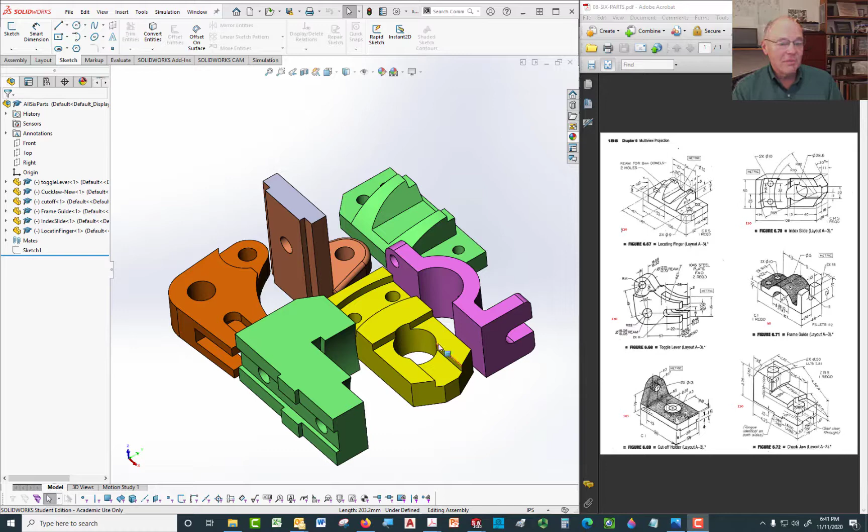This is what all of them look like, so we could move those around a little bit if you wanted, and they pretty much look like that. What I'm going to do though is open up each one individually and then rotate it around so you can really see what it looks like. So we'll go in order.

We'll go to the locating finger. Locating finger looks like this in the position that you see it in. Turn it around, you notice there's a notch at the top. One thing people sometimes don't recognize is there's a little shelf right here in front of the part that has a curve to it.

Turn it around, look up underneath it. Those holes go all the way through. Turn it around a little more, get it out of there. That's what it would look like from this side. That's this part right here.

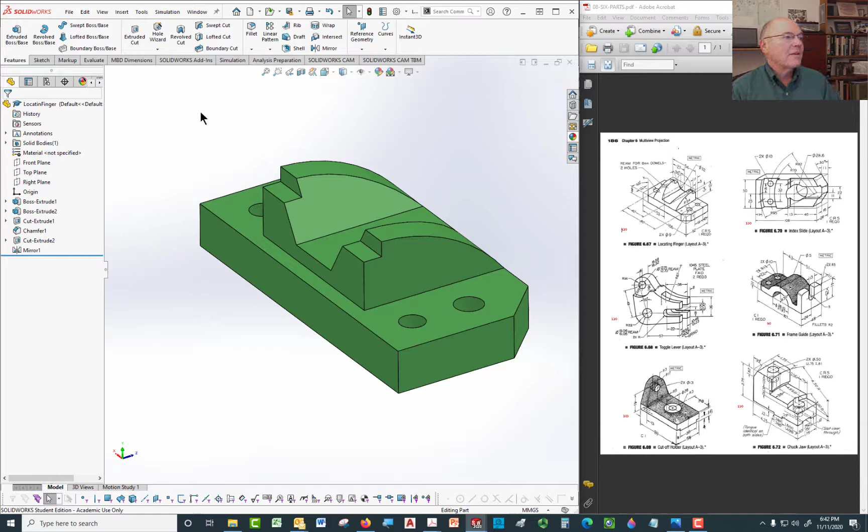Now we'll take a look at the index slide. Index slide looks like this. That's more or less the view that it was given there. Has a big hole that goes all the way down through the part. Sitting on its base, it would look more like this. The holes go all the way through.

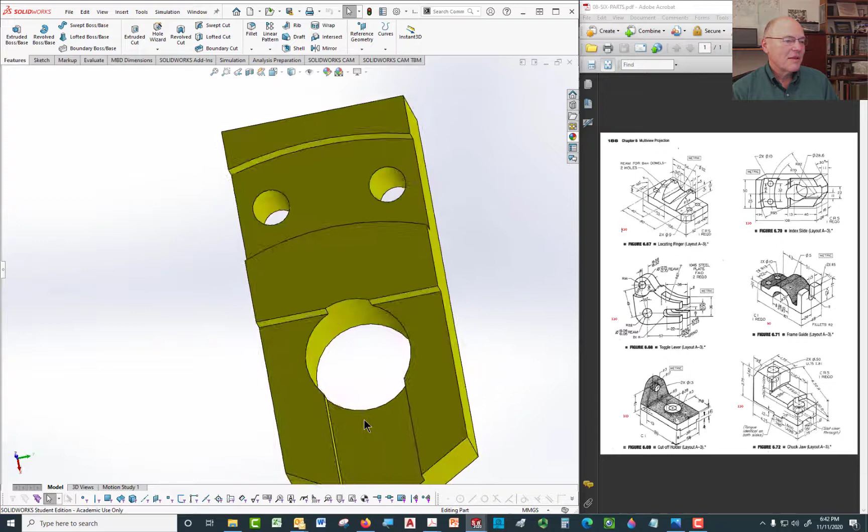And one of the things that you might be interested in is the fact that it looks like that from the top, and it would look like this from one end, look like that from the other end. You turn that around a little bit, you can see that looking down through there, you're going to see the back part of that hole right there. You can see that in the isometric drawing over here.

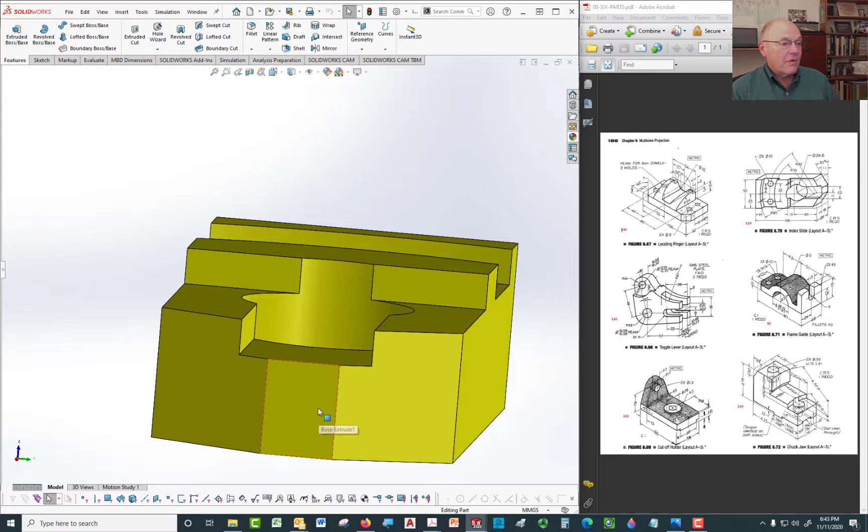And if you were to look straight at it, it would look like this. Let's tilt that a little. You might have it more look like that.

Next one we'll look at is a toggle lever. Toggle lever looks like this. Move that around a little bit. See there's a slot that goes all the way down through the center. Might be a little easier to see this if I turn on the edges.

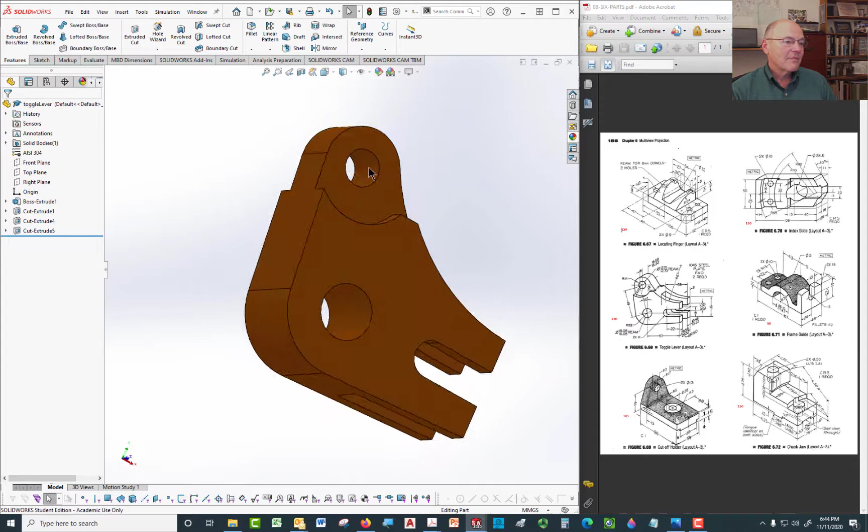I turn them off because I don't want you to think that tangent edges should be displayed. That edge right there would not be drawn in the part. But this does make it a little clearer just how deep that little groove goes. If we looked at it directly from the front, you also get the sense where that little shelf is right there.

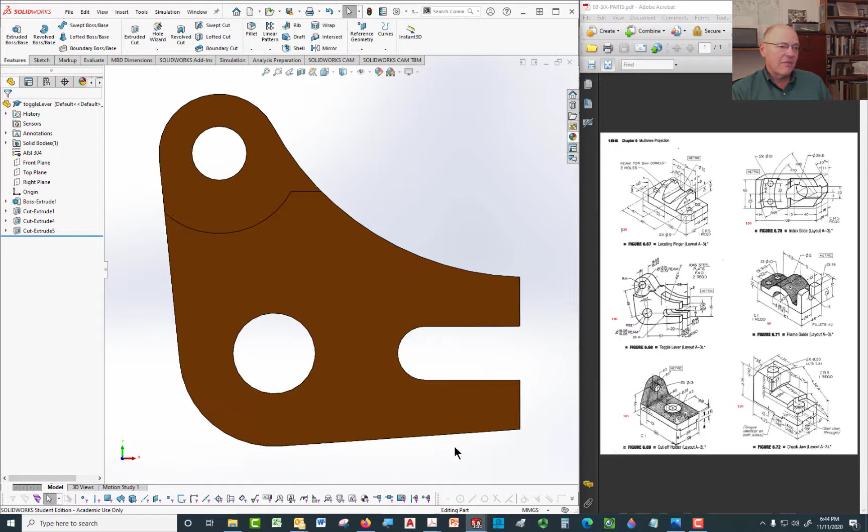If we looked at it directly from the front, it's clear that the base is not horizontal. Slopes down. Might not be as clear here, but that's what it would look like. So you have to have this arc drawn in. You have to locate that point over there and then draw a line that goes from that point tangent to that large arc. The frame guide looks like this.

Hole goes all the way down through. Look at it from one end, you notice that the slot itself would be kind of blocked if you looked at it from this end. Turn it around like this, and now you can see this end pretty well, but it would block a lot of the other features.

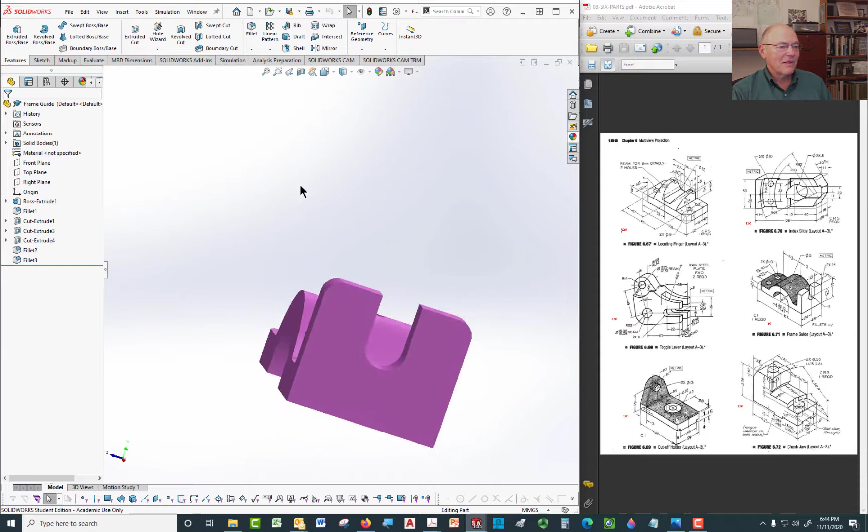There's some fillets in this. Fillets are right there, these kind of tiny little fillets. Again, I'll turn on the filleted edges. Those edges are where the fillets start and stop. They're all tangencies. You wouldn't draw that. You wouldn't draw this one over here, either one of those. So what it would really look like to the eye would be that.

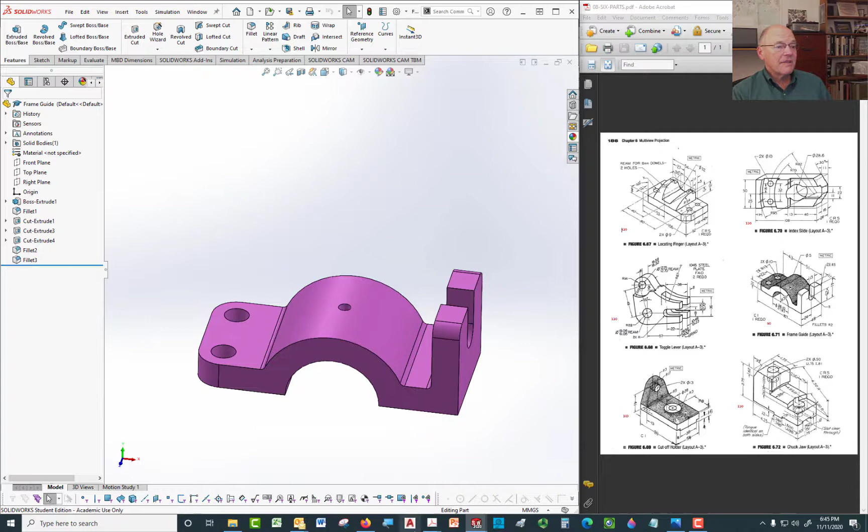However, by convention, in the top view of this, you would show where these two surfaces connect. So even though it would actually look like this, you should draw a line that comes right down where the two surfaces would come together so that it's clear that there's a feature that changes there. Otherwise, it looks like it's just flat in the top view.

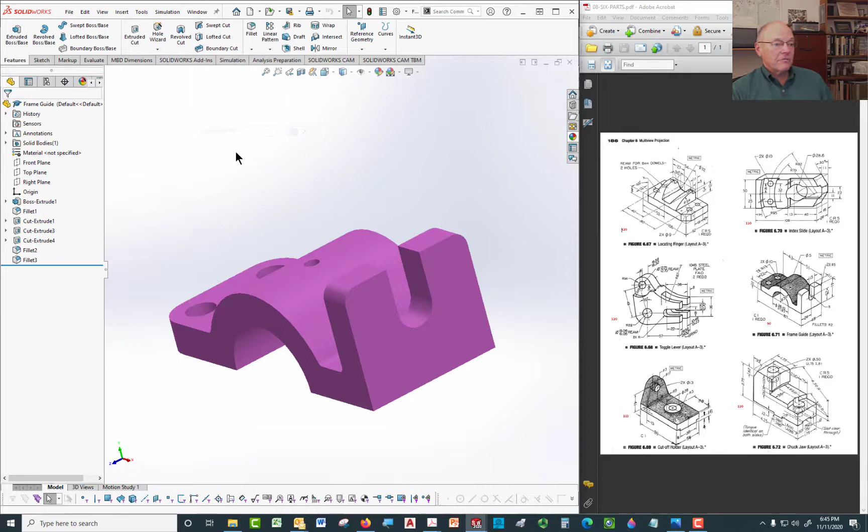Cut-off holder. Get the cut-off holder. Looks like that. Has a raised boss in the middle. That's that piece right there. It comes up, a little platform that's flat. Got two holes that are the same size. They both go all the way through. Got a couple grooves that go down through the bottom. The end looks like that.

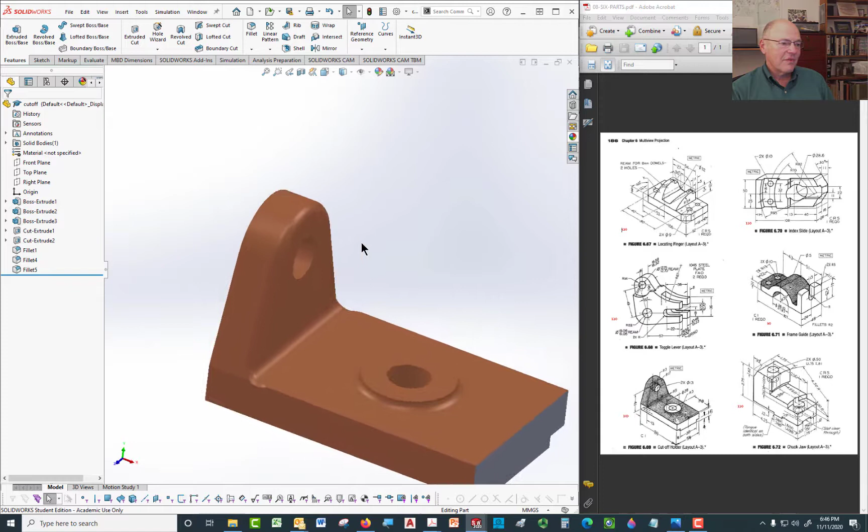And this also has a number of different fillets on it as well. There's a fillet on this edge right here. There's a fillet that goes across here. That's a machine surface. There's a fillet right there. Fillet goes all the way around. And then there's a round that goes down through here like that. Again, if we look at that with the tangent edges showing, you can see it's pretty distinctive, but by the naked eye, it would look like this.

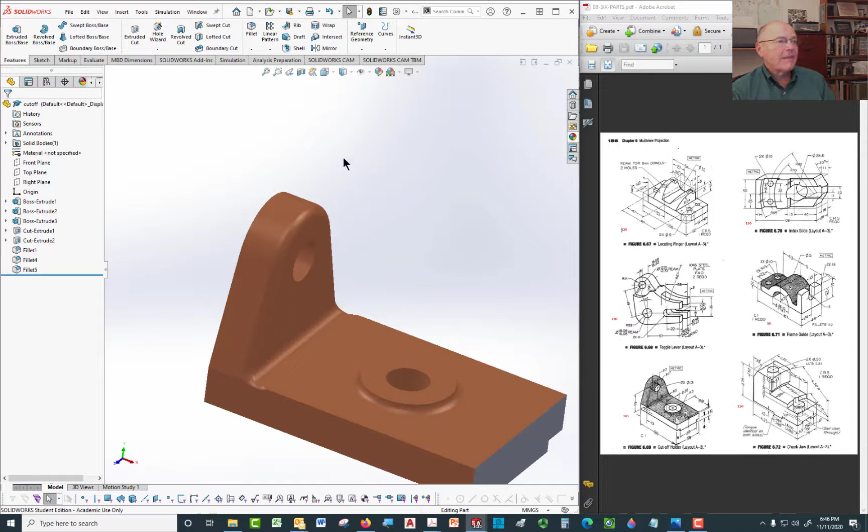The last thing is the chuck jaw. Chuck jaw is a part from a 4-jaw chuck that would go on a lathe. It's got a number of arcs in it. And it also has, this one maybe we should look at cut in half. Let's cut this one in half. We'll do a section view of this. Section view looks like that.

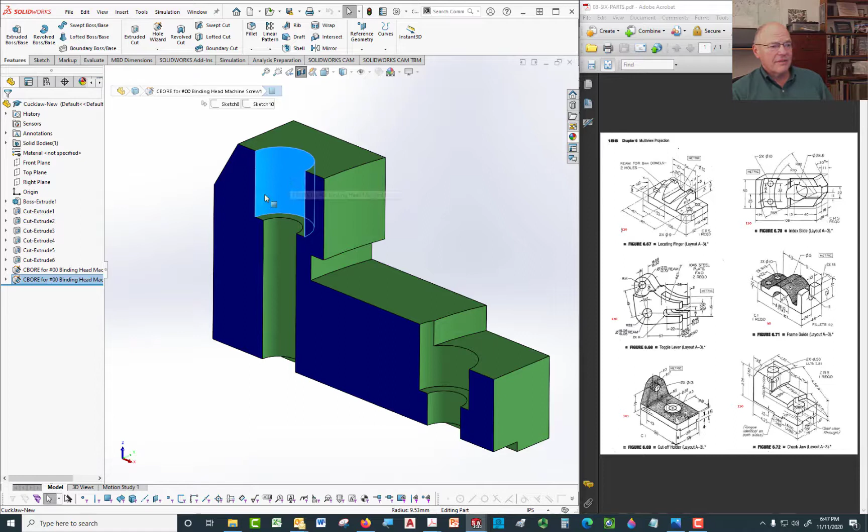So if you look at the inside, you've got a counter bore, which is a hole that's larger than the through hole. It goes down a certain depth, and it's given to you over here when you look at the dimensions. Right there, the diameter is 750 thousandths or 0.75, and the depth is 0.81. So the depth is going to be the distance from that surface to that surface right there. And there are two of them.

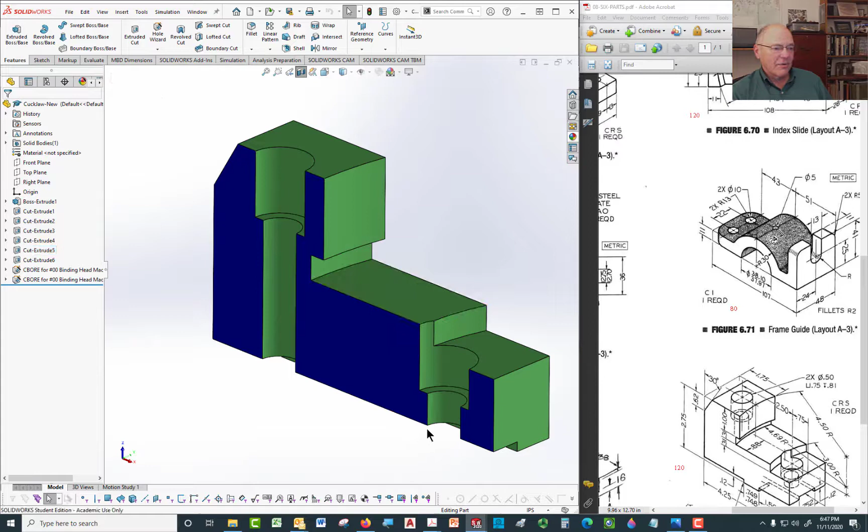In this case, the depth starts here because it starts at the deepest part of that counter bore. In both cases, they go all the way through. Notice they go through and they come out where the cutaway is on the bottom. If we take this off, you'll notice that those holes don't penetrate that surface and they don't penetrate this surface. So when you draw this, you want to be careful that your hidden lines are not misleading.

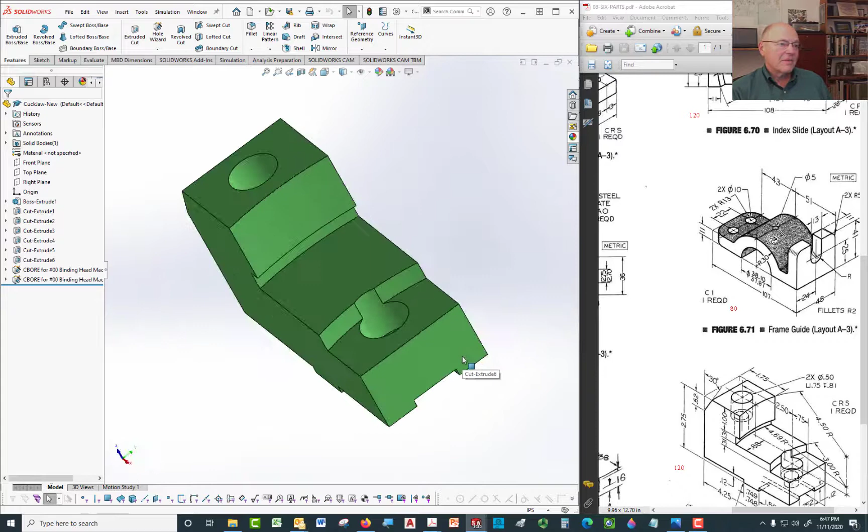That's what this one looks like. Got a couple things going on the bottom. Looks like that. Now I'm just going to go back to the full assembly with all of them, and I'll just rotate it around one more time, kind of slowly, and then I'll finish this up.

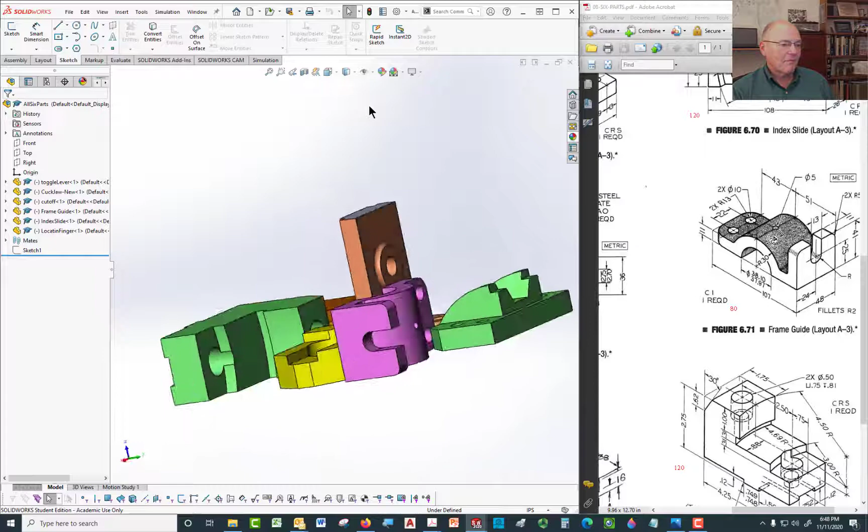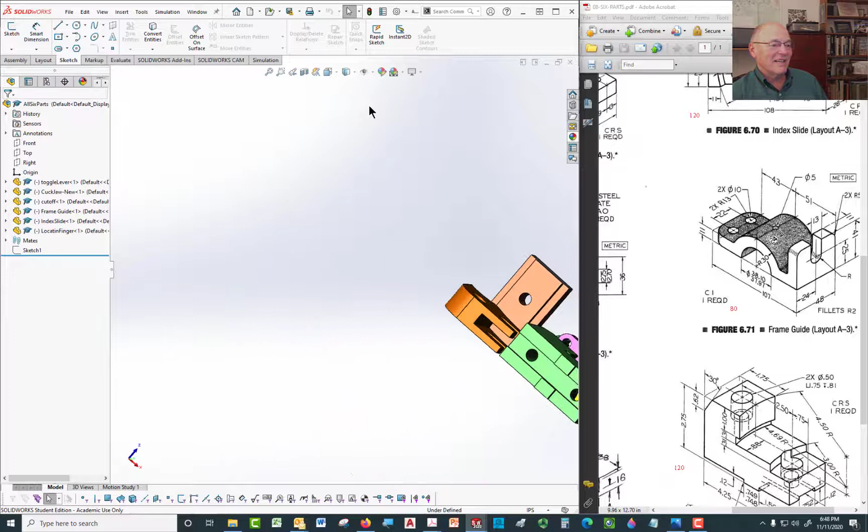I'm manipulating this with my 3D mouse, which I really enjoy because it's just so smooth. And it actually allows me to pull up, push down, move it sideways, rotate it. So I'm not actually using a standard mouse. This is a 3Dconnexion mouse. And if I really want to get crazy, I can do that as well.